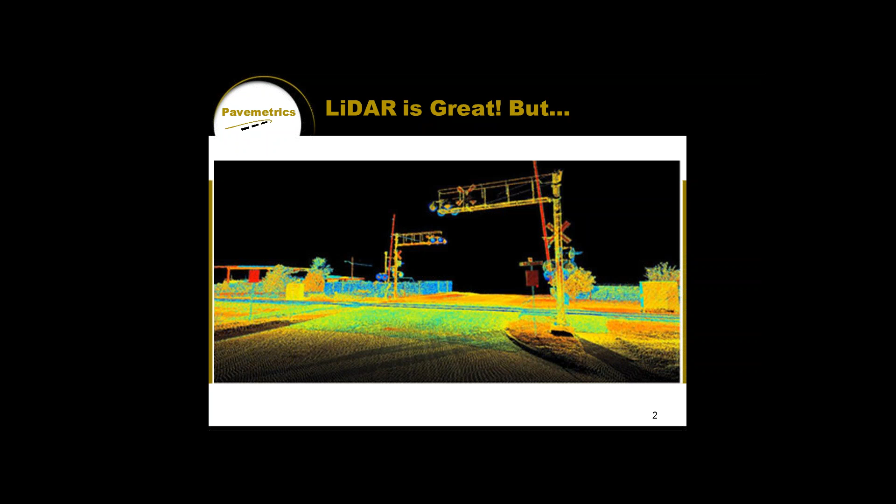Okay, so I'm going to advance to the agenda. Sonal, can you just confirm that the agenda's come up on your end? Yes, it has. Okay, great.

So we're going to start off with a bit of a talk about sensitivity, accuracy, the importance of millimeters. I'm going to focus on laser triangulation as a technology and explain how that works. I'm going to compare and contrast it to LiDAR so that everyone has a frame of reference, and we're going to talk a little bit about data processing and how that might differ from LiDAR. Then last but not least, we'll talk about spatially mapping the data and correcting it for geometry.

First, however, a very brief introduction. I work for Pavemetrics. Pavemetrics is a private company, but we're a spin-off of Canada's National Optics Institute, known as INO, based in Quebec, the French part of Canada. As a company, all we focus on is sensor development and algorithm development for the inspection of infrastructure. We're not in the business of collecting data, we're in the business of developing the technology for data collection. Our technology is used all around the world, in 40+ countries, to scan things such as roads, runways, railways, tunnels, including in India.

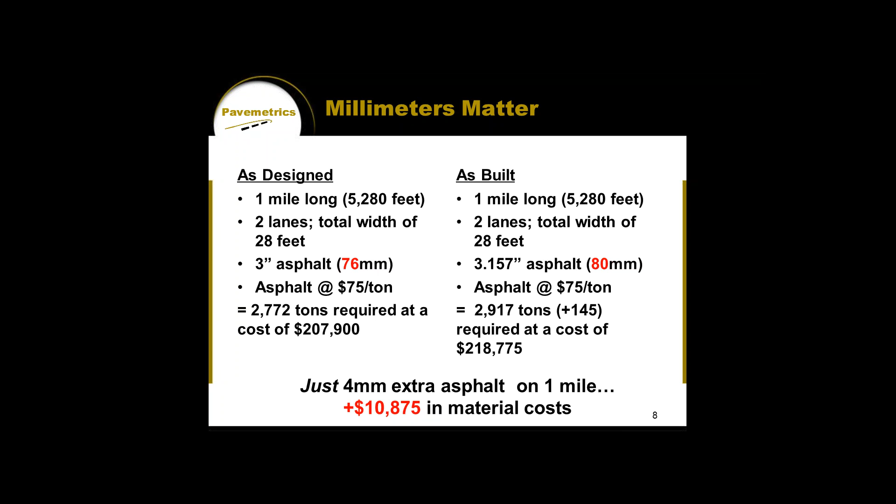That's just 4 millimeters of asphalt on 1 mile, and let's face it, 4 millimeters is a very small amount. And if you look at the accuracy per point of a technology like LiDAR, for example, plus or minus 5 millimeters is kind of where it tops out, okay? So putting too much down can be very costly. So if you don't get the measurement right on that side, that's an issue.

If you don't get the measurement right on the other side, if you build a concrete road, for example, and you're under thickness by just 10%, you can actually reduce the life cycle of that same road by 90%. So accuracy is important, and it depends on what you're measuring, it depends on the application, but when you're doing things like inspecting roads or inspecting rails or inspecting tunnels, the tolerances are really tight, and LiDAR in those cases is not necessarily going to be your best tool.

So here's a few examples of places you might want to think about other technologies like 3D laser triangulation. So if you want to detect cracks in pavement, most roadway agencies are looking at cracks that are in the range of 2 millimeters wide and a few millimeters long. You can't measure those kinds of things with something like LiDAR.

Railroad assets, if you're inspecting the rails themselves or the ties themselves, LiDAR is a great technology for seeing all the assets and how they're all related, but getting into the details of what's the actual condition of those specific assets, it's maybe not quite accurate enough, not quite enough resolution either. And then doing things like digital terrain modeling, inspecting tunnel walls, all these things.

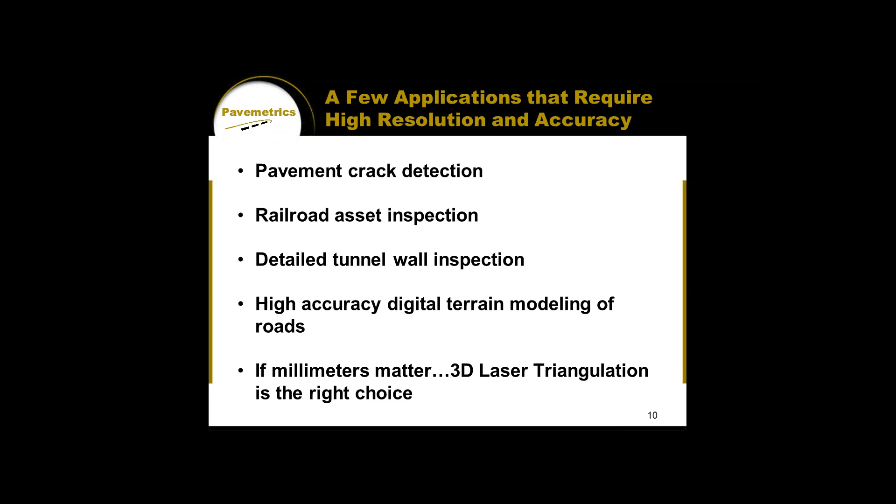So if millimeters are important in what you're doing, then I suggest you might want to think about 3D laser triangulation. So let's talk about what 3D laser triangulation is. How does it work? And I'm going to start off with a compare and contrast with LiDAR because it's a nice frame of reference for a lot of people.

So LiDAR is a time-of-flight technology typically. We send a pulse of light out and we measure how long it takes in time to go to an object and to come back. And because we know the speed of light, we can then translate those times into distances. It generates something like 200 to 400,000 points per second. Vertical accuracy per point is usually plus or minus 5 millimeters, something in that range, if you're doing things well. It's a great technology when you've got a large surface or a large area you want to scan.

I always think of things like a farmer's field or an intersection where I want to see where the lanes are and the signage, or maybe the side of a building, big objects. It's also great over long distances. You can be a few kilometers away, you can hang it off of a helicopter or a plane, and you can get data. So it's really nice that way.

And the way LiDAR systems are designed, there's moving parts, so you can set down a tripod and the LiDAR is still going to scan the area around it. You don't have to move the LiDAR sensor to get a scan. But of course, we all know there are also mobile LiDAR systems out there. You can mount a LiDAR system in a truck and drive it down the road.

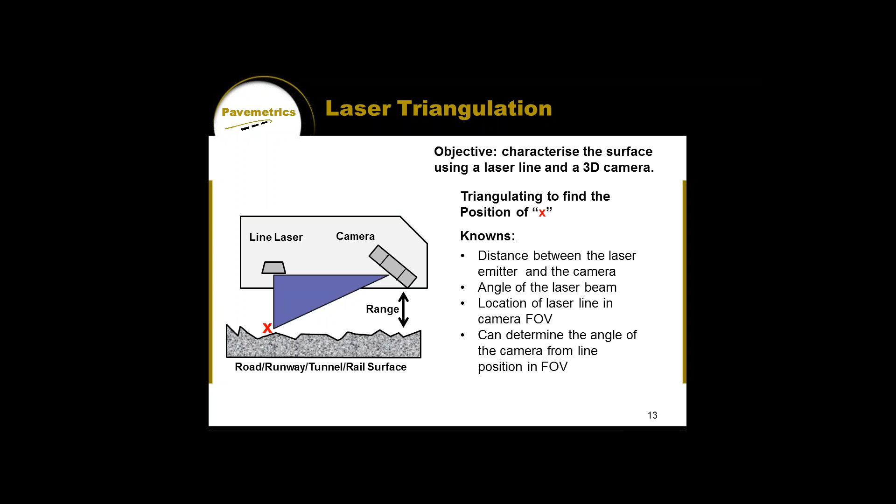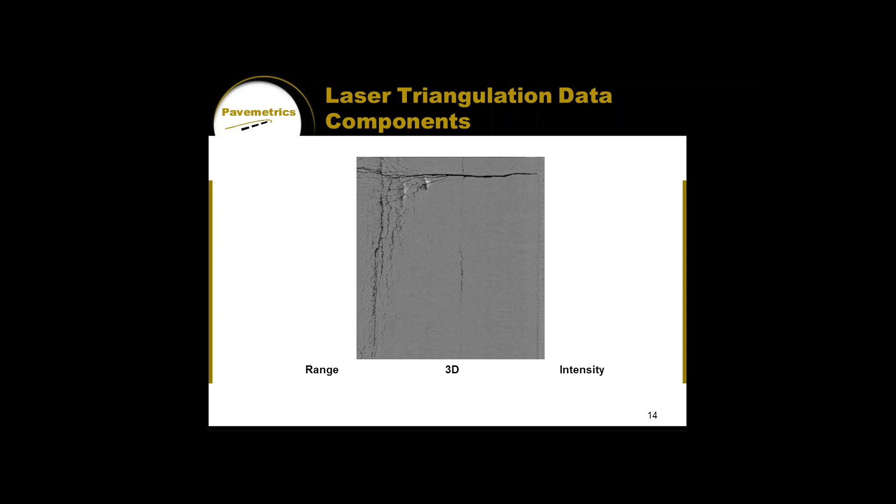And if I hit the button here, it's going to merge these two images, and we'll have a 3D representation. And then the last piece of the puzzle that moved it over top is the results of automated data processing. So there's an algorithm here that's gone through and processed the range data, and it's found all of the cracks that are at least 2 millimeters wide and about 3 millimeters, 4 millimeters long. And it's recorded their location, where do they stop, where do they start, the width, the depth, all of the relevant information.

As I mentioned before, it captures not only range data, but also full intensity image, a JPEG image of the surface. It can be used day or night. And really one of the big advantages of this type of technology is that from a processing standpoint, you don't just get point clouds. Bundled with this type of technology comes algorithms to automatically detect features that you might want to detect and make measurements you might want to make. So that's a big difference. We'll go into that in further detail.

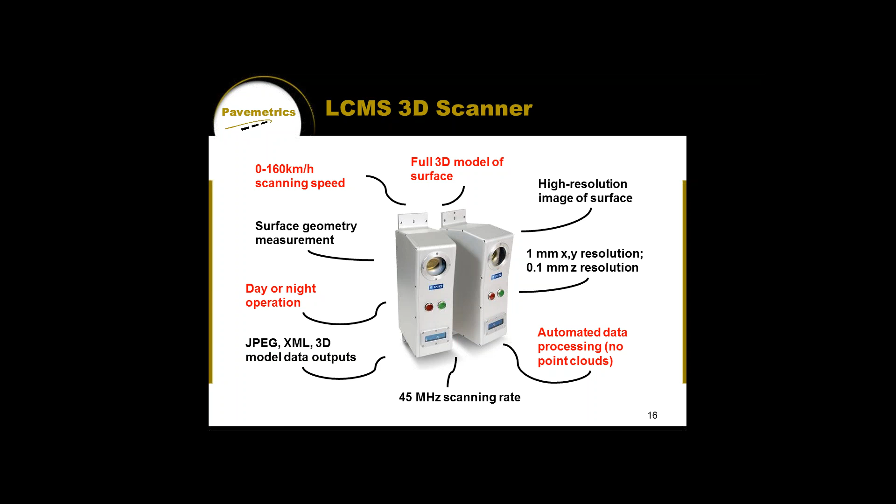Another one of the differences compared to something like LiDAR is that in most cases LiDAR, when you're collecting data, you've got a scanning frequency, and you're basically just free running. And so if you're using mobile LiDAR on the road and you slow down, you come to a stop at an intersection, that LiDAR scanner gets a huge amount of points in the area that you stopped in. It's rescanning and rescanning and rescanning.

Laser triangulation is a little bit different. We use pulses from an optical encoder, which is mounted on one of the driving wheels, that turns the wheel's revolutions into linear distance down the road, or down the tunnel, or railway, what have you. We use the pulses from that optical encoder to capture data on a distance basis. So when the vehicle stops, we're not capturing data. When the vehicle starts moving, we start capturing data.

And you can trigger as frequently as a scan every millimeter of travel along the road or along the rail or whatever surface. So incredibly high resolution, every millimeter scan. And then transversely, there's a point every millimeter as well. Okay? So it's a millimeter in the X, it's a millimeter in the Y, and then in the Z, you can go all the way up to 1/10 of a millimeter in terms of resolution.

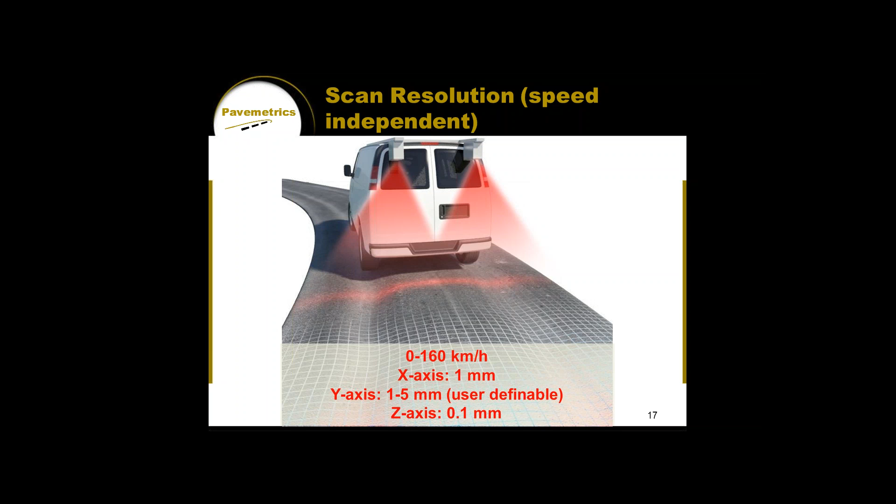In the rear of the vehicle, you have a sensor controller. You have a power inverter, which takes direct current from the vehicle's alternator and creates alternating current for the sensor controller, and then the sensor controller actually supplies different voltages that the sensors require. And all of the data is stored on an industrial PC. So typically you have removable hard drives that might be 1 terabyte or more in size, and as the vehicle's rolling down the road, it's filling up hard drives.

And then at the front of the vehicle, you can have an operator station, usually kind of a laptop that's networked in, and pretty straightforward. System doesn't require a lot of monitoring as you're collecting data. It just kind of runs automatically. So you hit start and you start driving, and it'll flag you if there are issues as you're collecting.

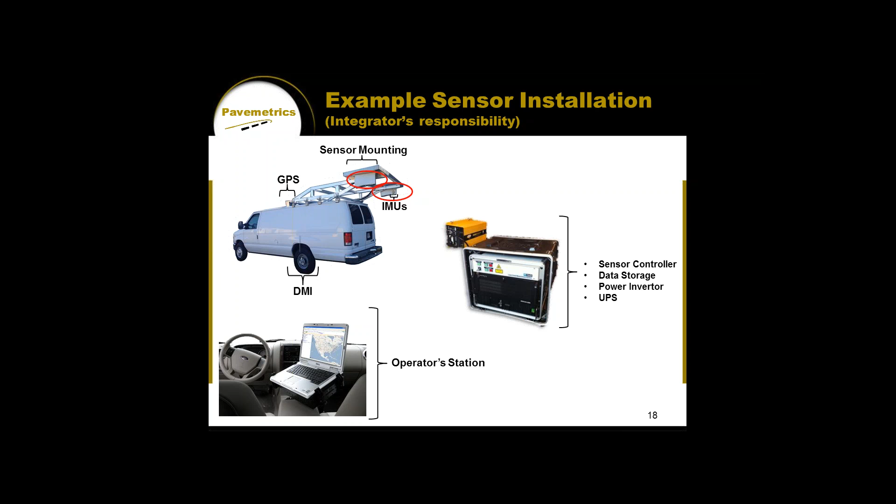So here's another example to kind of put these two pieces of the puzzle together. So I said before that there's no moving parts in here to scan the area. So how do you get a scan? So the illustration on the left is our sensor with the line laser and the camera, and this time I've put in some lenses there. And so as the vehicle is moving down the railroad track, that line laser, where it's intercepting, is changing. And so you can kind of imagine there's this line that's scanning the full width of the railroad track, the ties and the ballast, and so on and so forth, as the truck moves down the track.

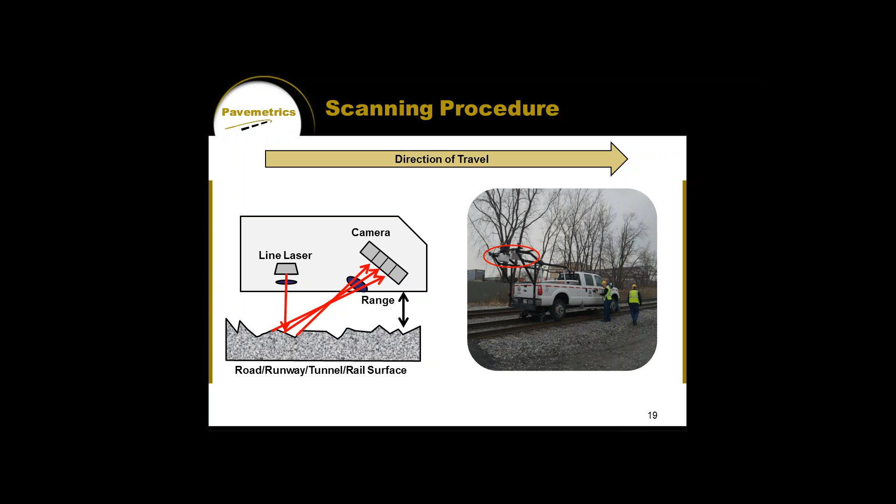Okay, so let me give you a few sample images and compare them to LiDAR, and just to kind of illustrate again pros and cons of using LiDAR, pros and cons of using laser triangulation. So first example is a railroad. Nice LiDAR scan. What I like about this image is that I can see the sleepers or the ties. I can't quite see the rail, but I know that the rail is there. And I can see a lot of the surrounding area. So if there were assets that were encroaching around the railway track that were maybe safety issues, I'd be able to see that. So it's nice from that perspective.

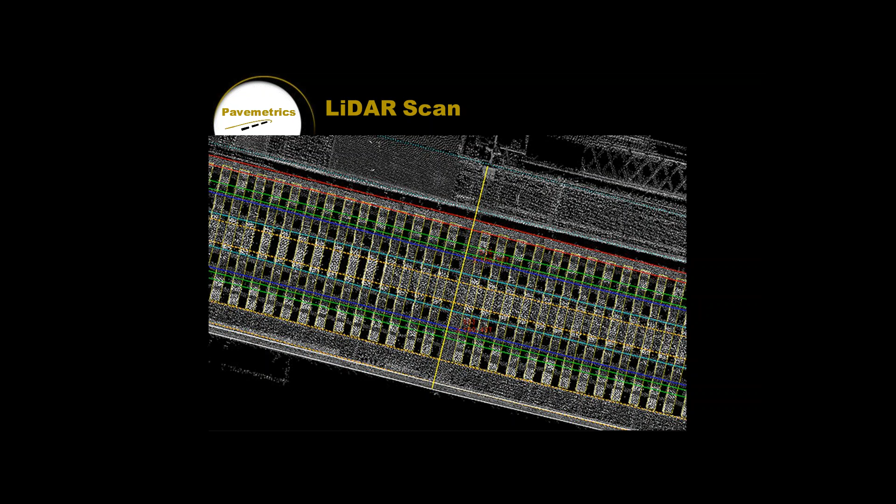But I can't really tell what condition the ties are. I don't have any sense. I've got a few points on those ties, but maybe I could see if there was one that was missing, but I can't tell much about them. And I can't tell where the fasteners are. Are there missing fasteners? Are there damaged fasteners?

This image I can tell from laser triangulation. So all of the cracks here have been automatically detected, and the parameters, the length and width and orientation, have been recorded automatically. But I can't see what else is going on around me. So that's the difference. I'm focused in on one area and I have a lot of resolution.

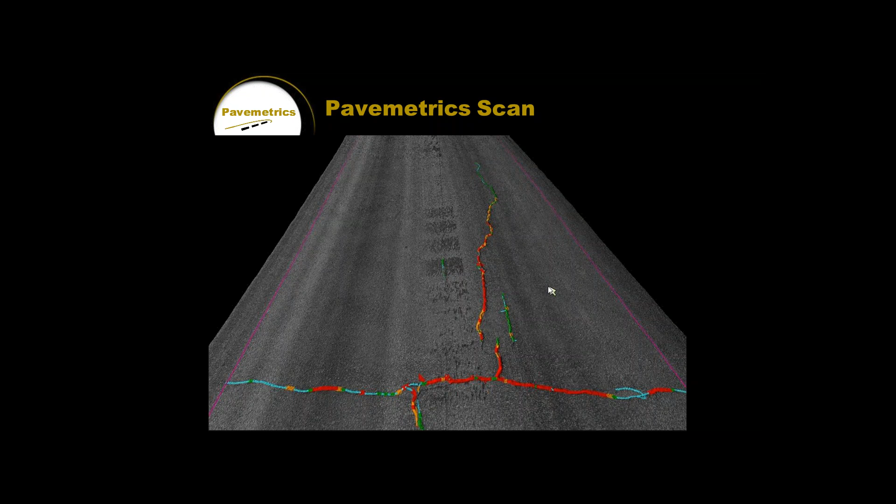Okay, Sonal, just a quick check. Are we on slide 28 on your end? Yes. Great.

Okay. So we talked a lot about how laser triangulation works in terms of what type of data you get out of it, what the measurement principle is. We've compared and contrasted it to something like LiDAR, maybe some of the pros and cons. We haven't really talked a lot about positioning that data and orienting that data, and that's really important. It's important in the LiDAR world.

It's important in laser triangulation as well. People want to know where the data is, and you need to make sure that when you collect the data that you compensate for the way in which it's collected. You compensate for vehicle motion so that when you get a scan of a surface, the shape of the scan isn't impacted by what the vehicle was doing at the time of scanning.

So let's look at it this way. You're driving down a road, you've got things like vehicle acceleration, deceleration. You hit the gas or you've got a brake because someone's in front of you. You've got pitch, right? When you jam on the brakes, the vehicle pitches forward. If you're moving into a corner or you're swerving around something, the vehicle's rolling. You've got centripetal force, you've got gravity, a lot of factors that are impacting the vehicle. And all of this is impacting the data as well if you don't compensate for it.

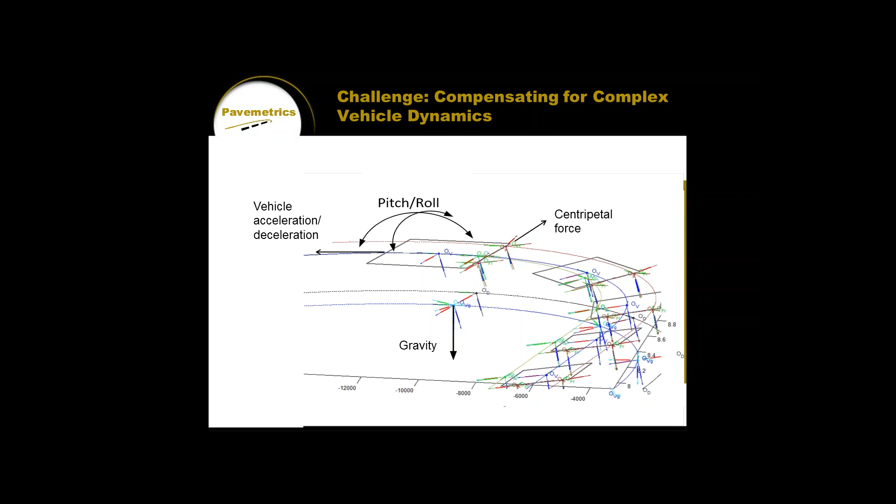So how do we do that? Well, we use inertial measurement units, like many people in the LiDAR world are familiar with. We supply our own inertial measurement units. We actually mount one on each of the sensors, and we align it with the laser window. And those measure the pitch and the roll and the heading of each of the sensors.

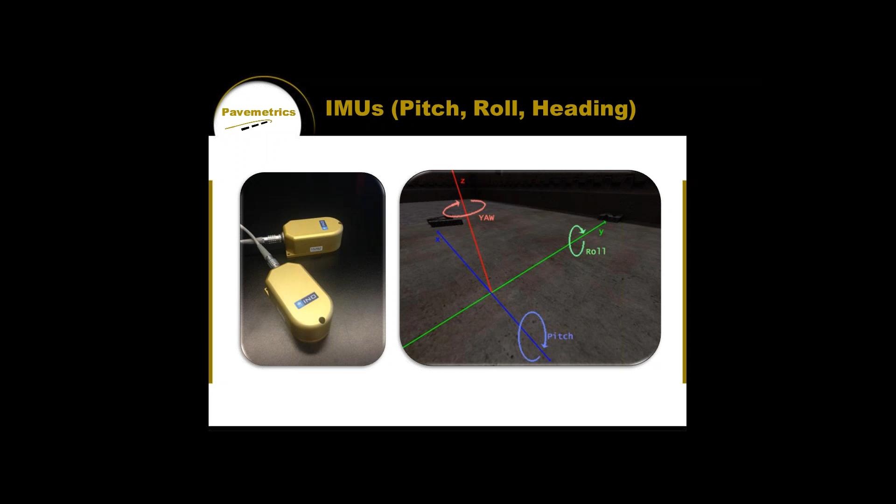Sometimes we get the question, well, why two? Why not just one? The reality is because we're scanning at such a high resolution, such a high accuracy, we need to know exactly what each one of those sensors is doing. We can't just take the pitch, roll and heading changes of the vehicle and then correct the data. We're handling millimeters and fractions of a millimeter, so we need to have one on each of the sensors.

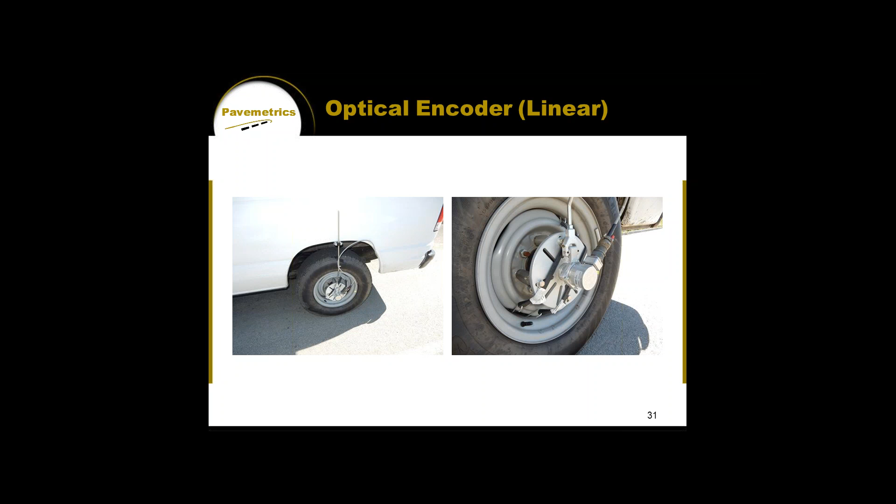This is our optical encoder that I mentioned before. So this is giving us linear distance down the road or down the track. And you can see it's just attached onto the studs or the lug nuts of the vehicle. Every time that wheel rotates, it generates 10,000 pulses. And those pulses are what we use to trigger the millimeter scans or the scans every 2 millimeters or 5 millimeters, whatever the interval the client is interested in using. Of course, we have GPS data that's coming in, so we've got latitude, longitude, elevation as well for the vehicle.

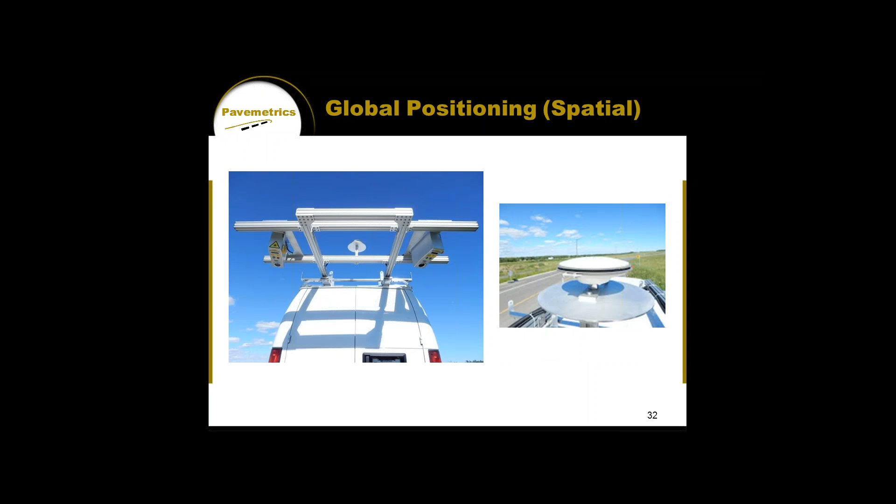So one of the challenges then is we have all these different coordinate systems, right? We've got IMU data, we've got linear data, we've got GPS data. So how do you get everything onto the same plane? How do you coordinate everything and consolidate everything? So one of the things we do is we have a calibration object. This is a precision machined object where we know all the dimensions, we know all the angles, and we set it down on the road or between the rails or wherever we're scanning, and we move the scanners over top of it. So we get a scan of the same object with each of the sensors simultaneously. And that allows us to calibrate those two sensors together.

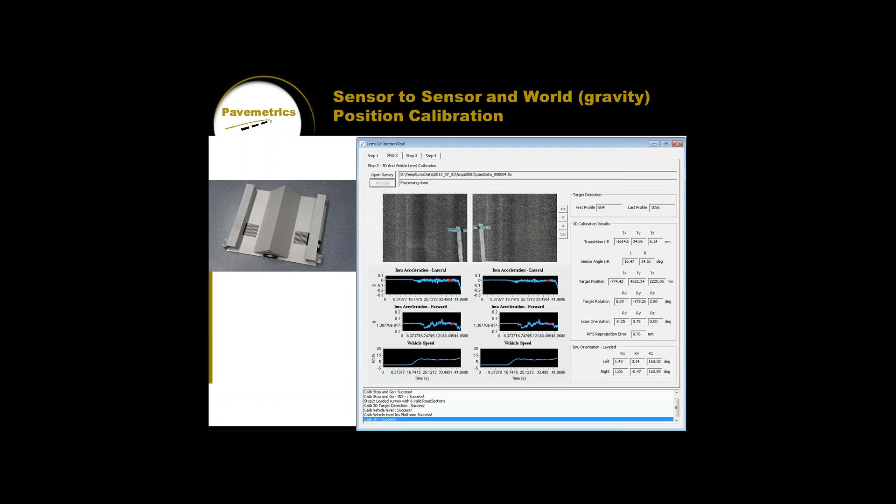So we have an automated calibration process. You can see a screen capture here showing you it's a 1, 2, 3, 4-step process. And you drive over top of the object and it guides you through the process of making that calibration. So this image is showing us what the 3D points look like from that object as we drove over top of it, and it's two sensors that have been merged automatically.

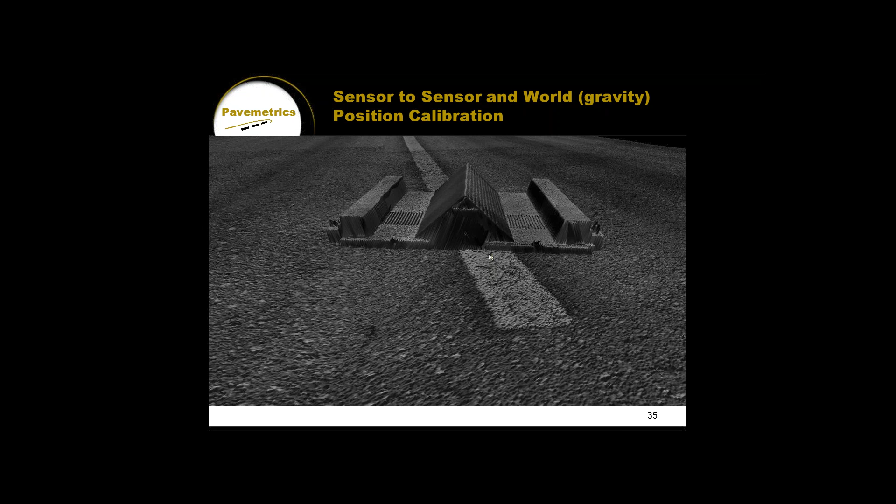Next image is the intensity data for that calibration object as we've driven over top of it as well. And what we're looking for here is a really nice seamless merging of the left and right sensors in the middle. So I'm looking at this pavement marking and I'm not seeing any seam. I'm looking at the calibration object. I'm not seeing any seam. I'm looking at the shape of the rocks in the road. I'm not seeing any seam. So this is a really well-calibrated pair of sensors.

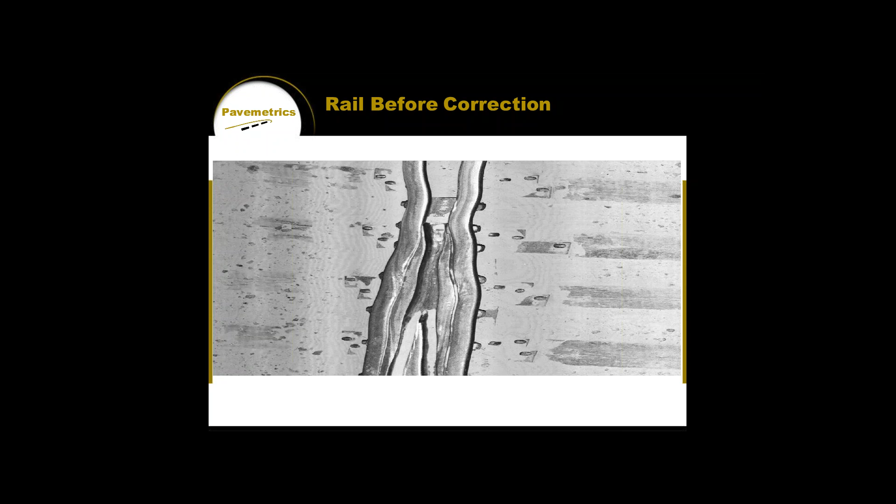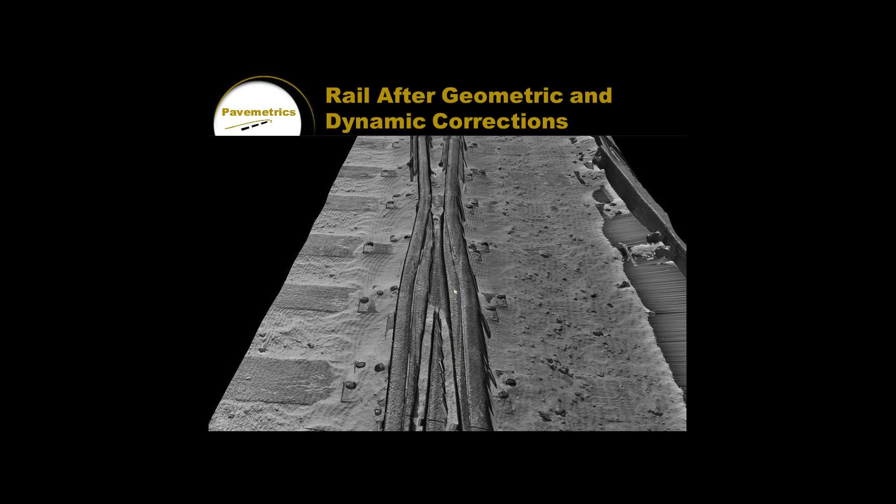This is what the switch actually looks like. Nice and straight. We've restored it to how the actual rail looks in real life. So we've corrected for all of those vehicle motion issues.

So from a data processing standpoint, let's talk a little bit about that. This is one of the last segments of the presentation. One of the big differences is you're not dealing with point clouds. When it comes to laser triangulation, we develop computer algorithms that automatically sift through millions and millions of points, and we can automatically detect differences of only a few millimeters. So from a labor standpoint, from a time to complete the project standpoint, from a repeatability standpoint, from an objectivity standpoint, there are a number of advantages over something like LiDAR.

From a data processing standpoint, from an algorithm standpoint, we develop algorithms that look at not only the 3D shape of the surface for things like a crack, which would be a distortion to the 3D shape, or a rut in a road, but we also look at the intensity data - how much light is reflected. Pavement markings, for example, have glass beads in them, and those glass beads reflect a lot of light, so we can develop an algorithm to detect pavement markings automatically, and then use that to generate break lines or create a line inventory or some other application. We also look at other streams of data like the geometric data from the IMUs, and that's how we correct the images for vehicle motion.

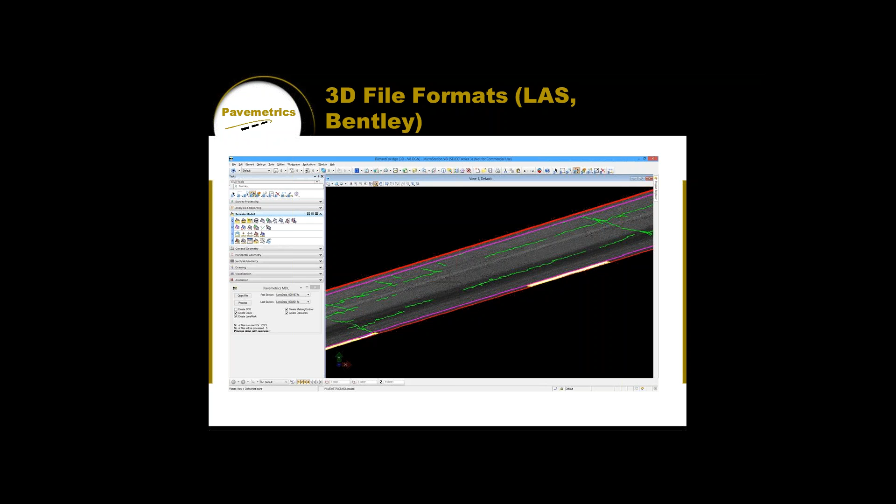Let me give you a few examples of what kinds of things can be done from a processing standpoint. This algorithm goes through, and for a 10-meter section takes a couple of seconds on a high-end computer to find all the cracks that are 2 millimeters and wider, and it rates them according to how wide they are - what's the severity, is it low, moderate, or high severity. It classifies it - is it a transverse crack, a fatigue crack, a longitudinal crack. These are all things that are relevant for a road agency trying to better manage their pavements. They want to know how severe the cracks are and what kinds they are, and that tells them something about how the cracks were formed and what's a good treatment for the crack.

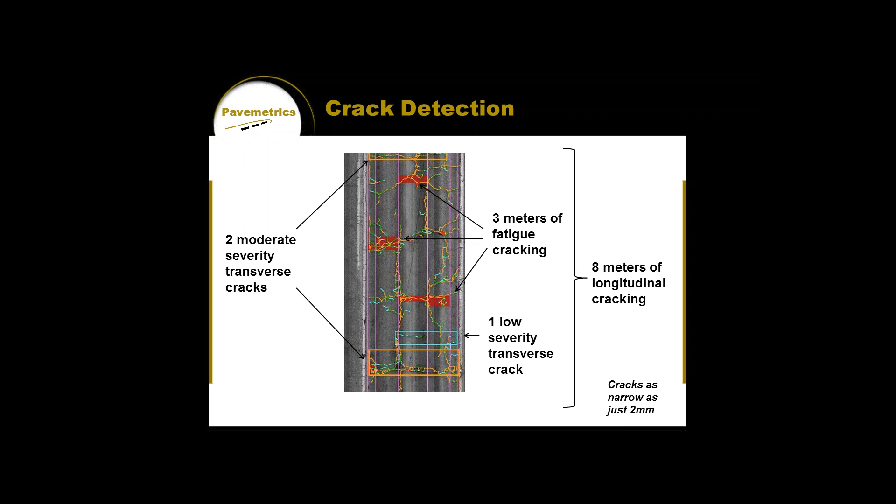Here's another example. We look at the 3D shape of the rail surface, and we're detecting very, very small flaws in the surface - a few millimeters deep, maybe 10 to 20 millimeters long, 5 millimeters wide.

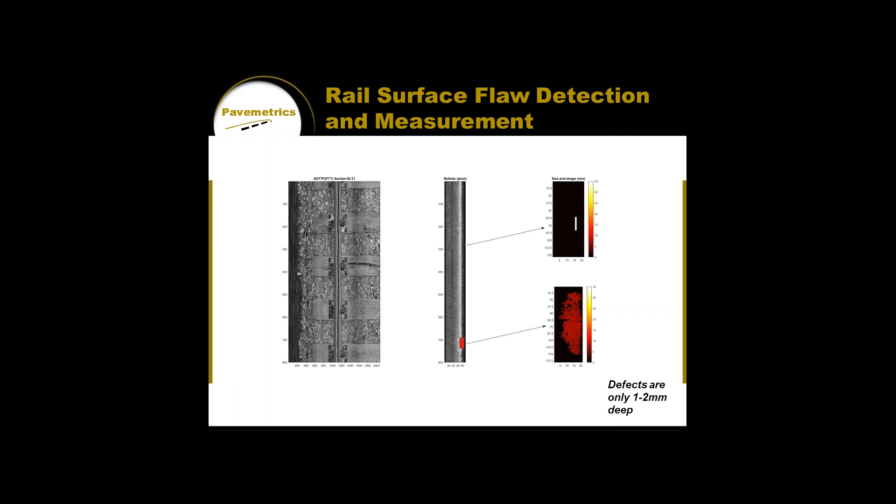Wooden tie inspection is another application. This algorithm goes through and finds ties that not only have one or two cracks, but have sufficient cracks to compromise the structural integrity of the tie. If you look at the second tie down from the top, there's a crack highlighted in red, and that crack goes all the way underneath the rail on the right-hand side - you can see it out at the right-hand side of the image. That's a dangerous condition. In this case, the green ties are ties that pass the criteria - they're acceptable.

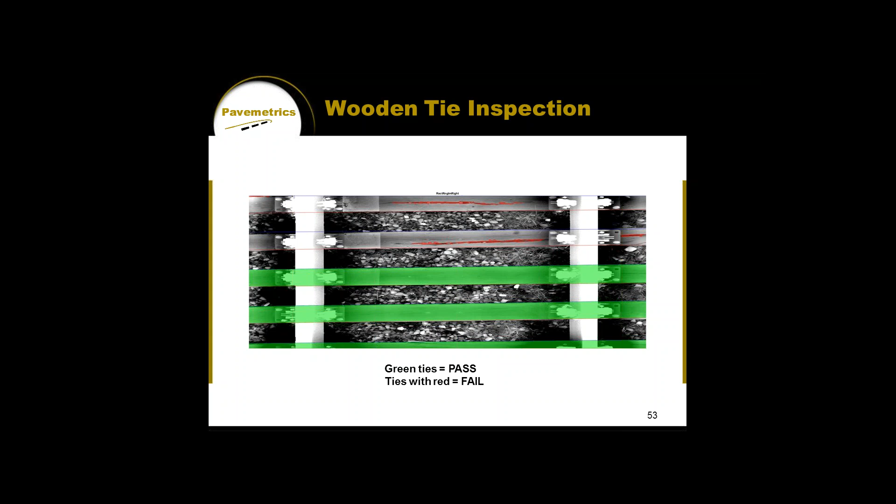So that's a few examples of the types of algorithms. Many more exist for this technology, and the real strength of a company like Pavemetrics is that all we do is develop algorithms. That's really our focus. So pretty much anything you see in the 3D scans or intensity images can be detected or measured. It's really up to your imagination as to what algorithms might be developed.

So, conclusion. LiDAR is a great technology. As I said before, it's really well suited to environments where you need a very broad scan, where you want to scan a large area. 200 to 400,000 points per second is fine, and plus or minus 5 millimeters is enough accuracy. It's a great technology in those cases.

There are some cases where it's not a good technology. If millimeters are important to you, if you need a really high resolution scan to do things like rating the condition of the road or finding flaws in railway environments or tunnel walls, LiDAR is not going to be a great technology in that case.

So it's not about picking the best technology—LiDAR isn't less good or less capable than laser triangulation, and vice versa. It's about picking the right technology for the right job. So I hope that today you learned a little bit about why you might want to think about laser triangulation, how it differs from something like LiDAR, and maybe some ideas about where you might use that in the future.